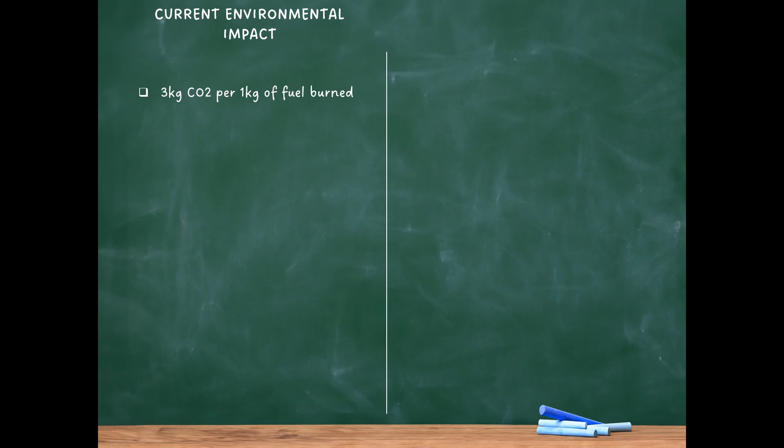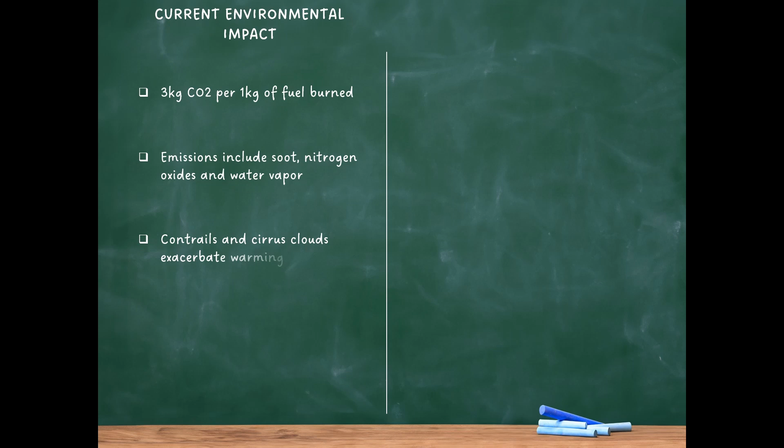To answer this question, we must first understand the environmental impact of current aviation practices. According to emissions research by the European Commission's Clean Sky Initiative, modern aircraft engines emit slightly more than 3 kilograms of carbon dioxide for every kilogram of fuel burned during a flight. Beyond carbon dioxide, these engines release soot, nitrogen oxides, and water vapor at high altitudes, all of which contribute to atmospheric warming. The problem is exacerbated by the formation of contrails and cirrus clouds, which trap heat in the Earth's atmosphere, further amplifying the warming effect.

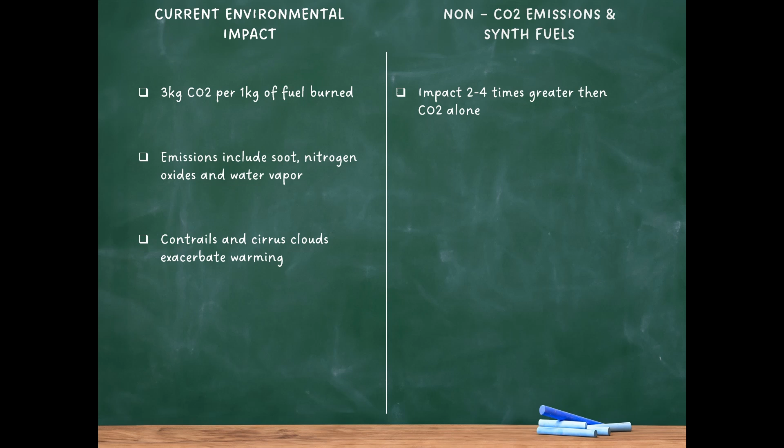Recent scientific studies suggest that non-carbon dioxide emissions from kerosene-powered aircraft could have an overall impact 2 to 4 times greater than carbon dioxide emissions alone. This means that aviation is responsible for approximately 3 to 7% of the total global carbon dioxide equivalent emissions from human activities, translating to between 2 and 4 billion tons of carbon dioxide annually.

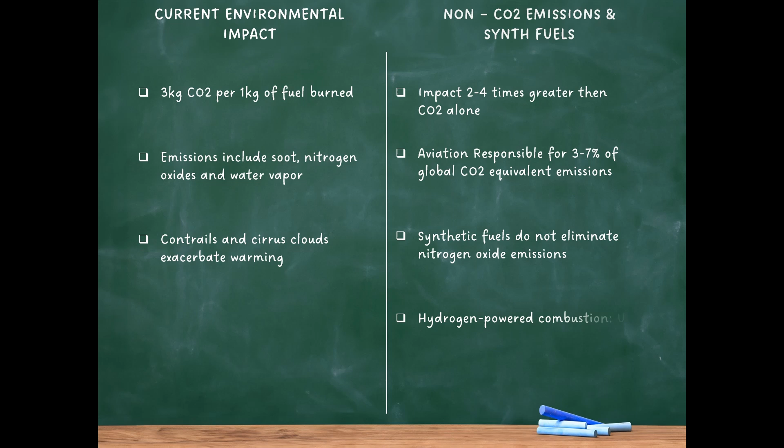The switch to synthetic fuels, while a step in the right direction, does not eliminate the nitrogen oxide emissions inherent to jet engines. However, initial research on hydrogen-powered combustion aircraft indicates a reduction in these emissions by up to 80% without significant efficiency losses. If hydrogen-powered fuel cells are used, the benefits become even more pronounced. Fuel cells eliminate nitrogen oxide emissions entirely, offering a clean and efficient alternative to traditional jet engines.

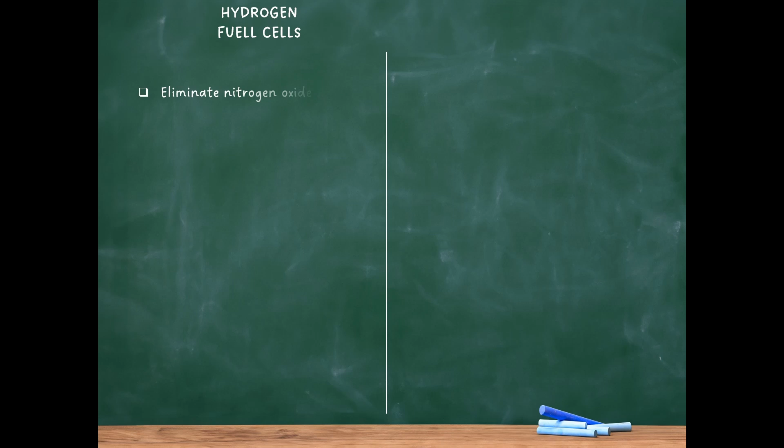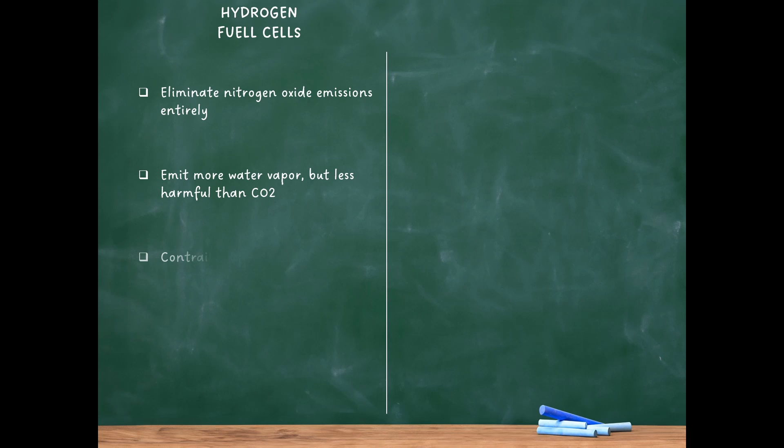However, hydrogen combustion and hydrogen fuel cells do emit water vapor, about 2.5 times more than synthetic fuels or kerosene. While water vapor is the dominant greenhouse gas in the atmosphere, individual water molecules are significantly less harmful than carbon dioxide molecules. Moreover, early simulations of hydrogen combustion show that the contrails produced by hydrogen-powered aircraft contain heavier ice crystals, which fall back to Earth more quickly, reducing the overall warming effect. Additionally, these contrails are free of soot, making them more transparent and less impactful on atmospheric warming. The result is a 30 to 50% reduction in the impact of contrails and cirrus clouds compared to kerosene-powered aircraft.

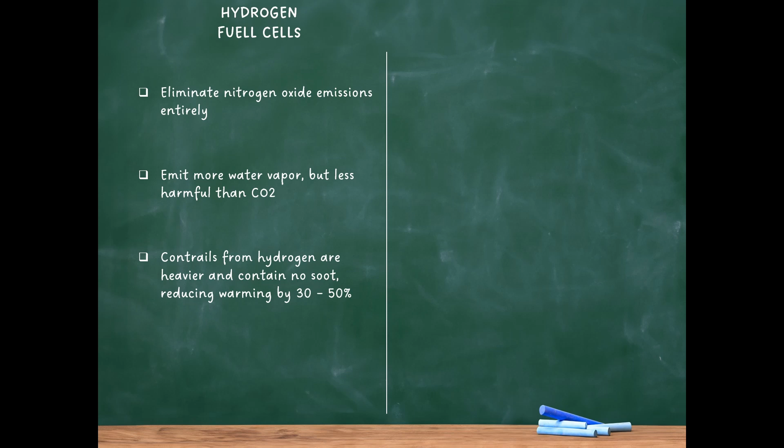In the case of fuel cells, the water vapor can even be captured and managed within the aircraft, further minimizing environmental impact. The differences in emissions are particularly relevant during the critical phases of takeoff and landing. Synthetic hydrocarbon fuels, while producing fewer particles than kerosene, do not significantly reduce other pollutants. Hydrogen, on the other hand, not only drastically reduces nitrogen oxide emissions, but also releases far fewer harmful particles and volatile organic compounds without any methane emissions.

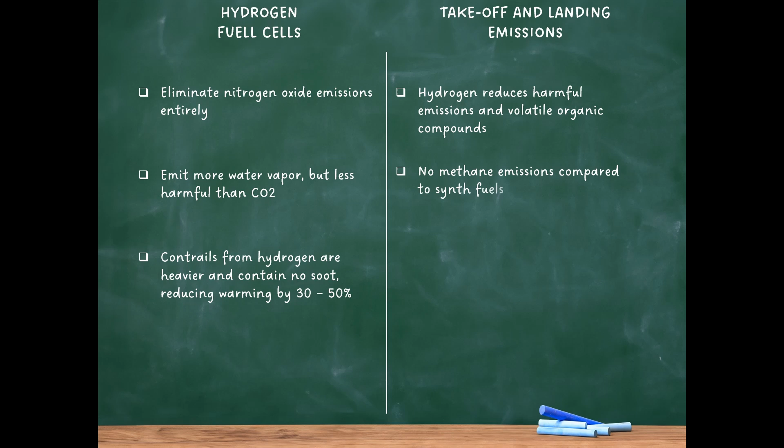At this juncture, it is important to acknowledge the role of lithium-ion batteries in aviation. While they produce no local pollution or atmospheric warming, their current limitations make them more suitable for short-haul flights under 1,000 miles. This is significant because 80% of pre-COVID aviation industry emissions came from long-haul flights. Studies by the European Union suggest that if the aviation industry were ranked as a country, it would be among the top 10 global greenhouse gas emitters.

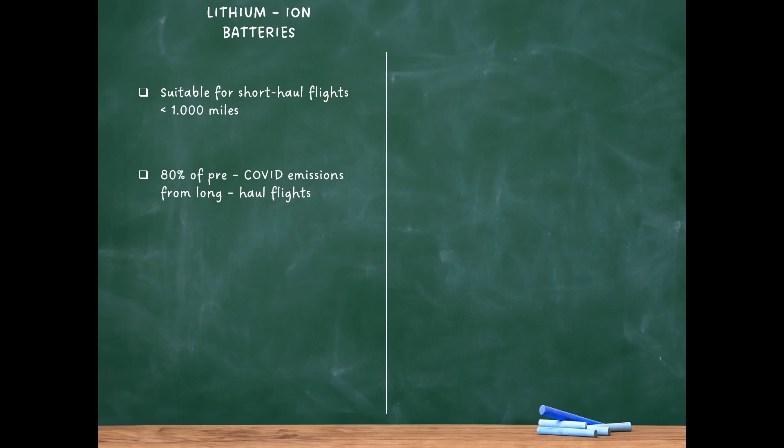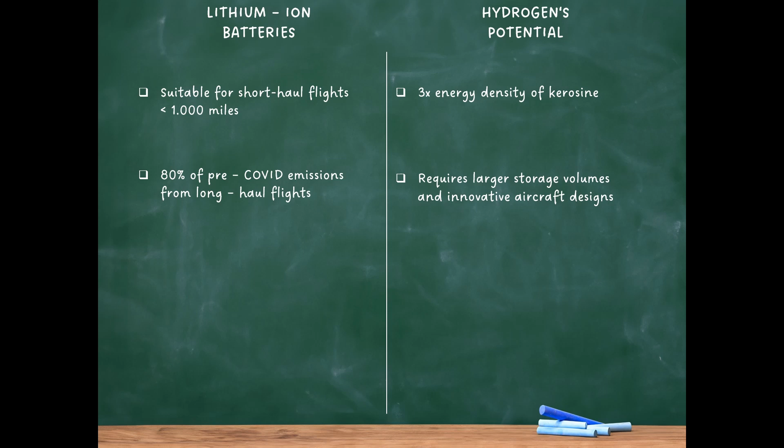Given these challenges, hydrogen has emerged as the preferred fuel for future aircraft development among major industry players. It offers a remarkable energy density, 3 times that of kerosene on a pound-for-pound basis. However, it also requires significantly larger storage volumes, necessitating innovative aircraft designs to accommodate these larger fuel tanks. This fundamental shift in design will influence everything from aerodynamics to passenger capacity.

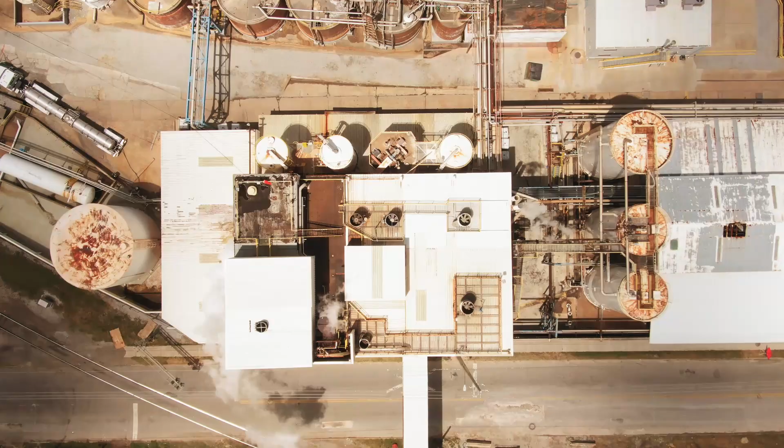Before delving further into the application of hydrogen in aviation, it is essential to understand how it is produced. Hydrogen can be generated through various methods, broadly categorized into production from renewable resources, nuclear energy, and fossil fuels. Currently, the most common method is natural gas steam reforming, which accounts for about 95% of global hydrogen production due to its economic efficiency. However, this method still relies on fossil fuels and contributes to greenhouse gas emissions. Alternatively, hydrogen can be produced through the electrolysis of water, a process that can be powered by renewable energy sources like wind or solar. This method offers significant environmental benefits, particularly if the efficiency and cost of production can be improved.

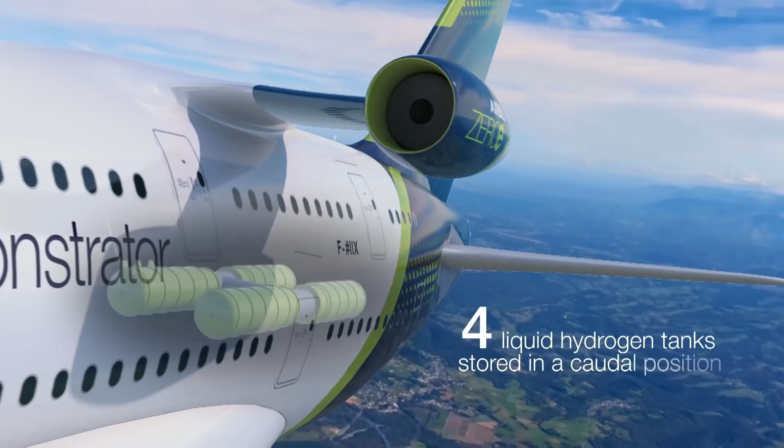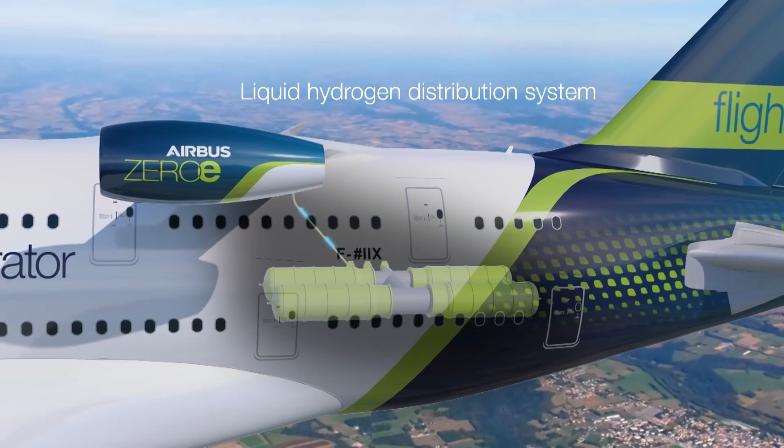As we consider these methods of hydrogen production, the next significant challenge lies in how to store and integrate hydrogen effectively within aircraft structures, which requires innovative tank configurations and shapes. The storage of hydrogen on aircraft poses significant engineering challenges due to its low density and the need for cryogenic temperatures to maintain it in a liquid state.

Liquid hydrogen has a volumetric energy density much lower than kerosene, meaning that tanks must be significantly larger to store the same amount of energy. This necessitates innovative tank configurations and shapes to integrate liquid hydrogen storage effectively into the aircraft design.

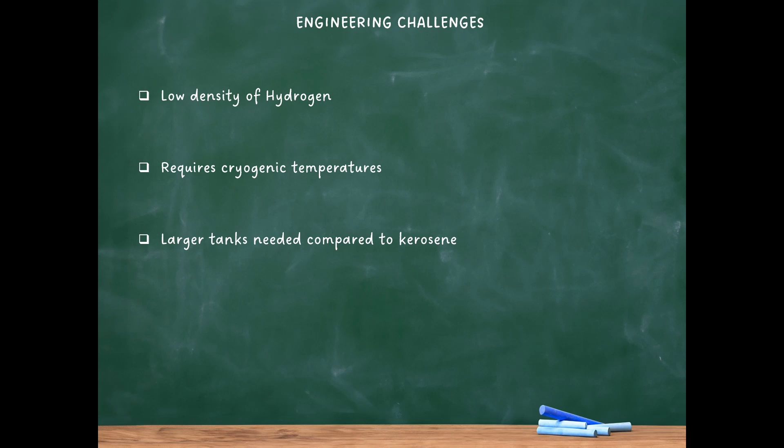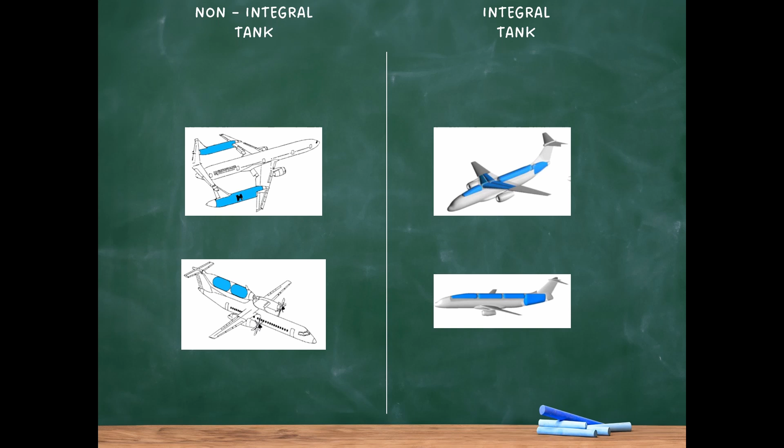Two primary tank configurations are considered: non-integral tanks and integral tanks. Non-integral tanks are mounted externally on the aircraft, such as on the fuselage or wings, which can lead to aerodynamic drag, but offers greater flexibility in design. Integral tanks, on the other hand, are built into the aircraft structure, offering reduced drag, but requiring the tanks to

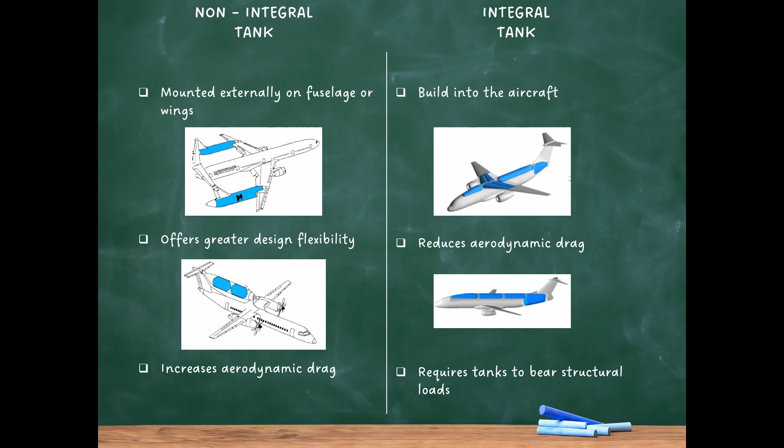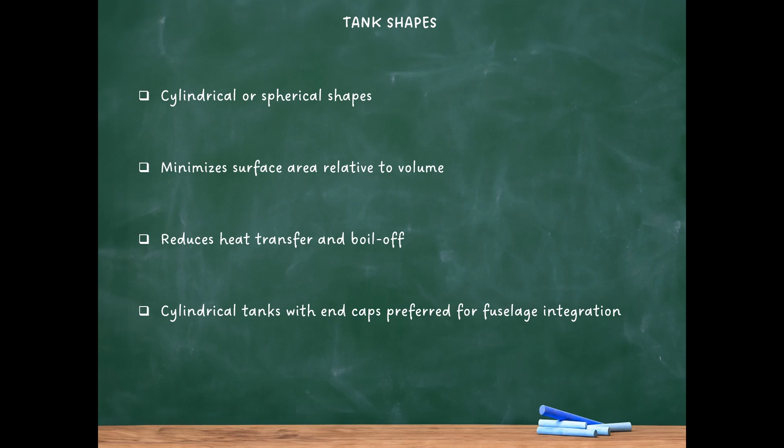bear structural loads. The shape of these tanks is typically cylindrical or spherical, as these shapes minimize surface area relative to volume, reducing heat transfer and thus boil off. However, cylindrical tanks with end caps are often preferred for their ease of integration into the fuselage and higher volumetric efficiency. Beyond the shape and configuration, another crucial aspect to consider is how these tanks are insulated to maintain the

hydrogen at cryogenic temperatures, which brings us to the importance of tank insulation and volume management. Insulation is critical for maintaining hydrogen at cryogenic temperatures during flight. Several insulation methods are used to minimize boil-off and maintain hydrogen in its liquid state. These methods include both internal and external insulation approaches, each with its own advantages and challenges.

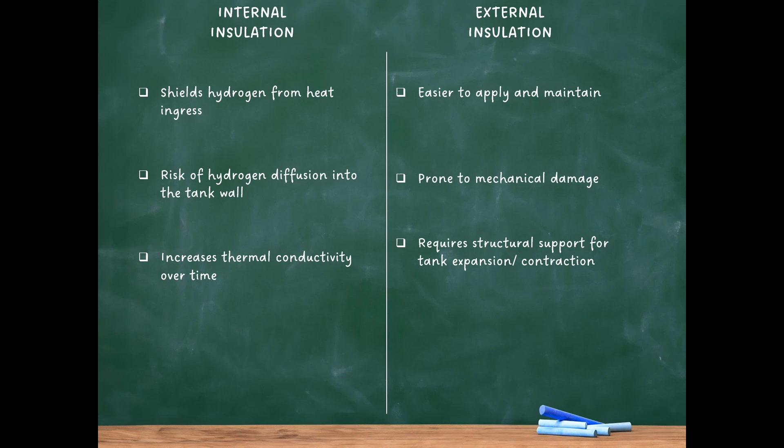Internal insulation involves insulating the inside of the tank, directly shielding the liquid hydrogen from heat ingress. However, this method can lead to hydrogen diffusion into the tank wall, which increases thermal conductivity and reduces effectiveness over time. External insulation, where the insulation is applied on the outside of the tank, is easier to apply and maintain, but is more prone to mechanical damage and requires structural support to accommodate the expansion and contraction of the tank

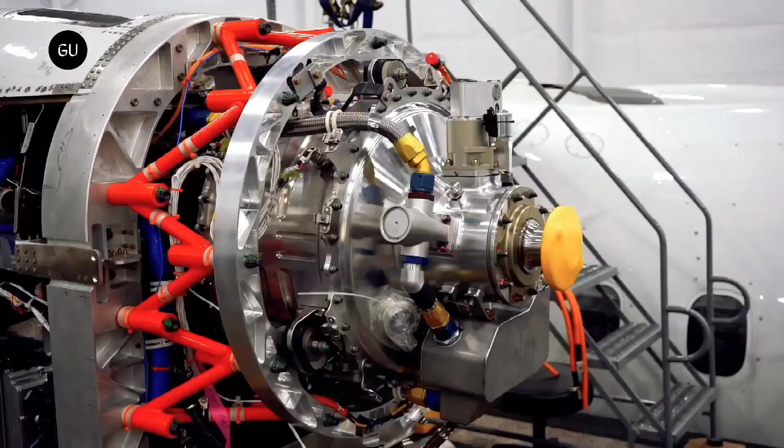during operation. The choice of insulation materials is fundamental to the performance of hydrogen storage tanks, particularly in maintaining cryogenic temperatures and minimizing boil-off. Among the most effective materials and techniques used are multilayer insulation, vacuum insulation, and foam insulation.

Multilayer insulation consists of multiple layers of reflective materials, typically alternating between metallized films and thin spacers, which are designed to minimize radiative heat transfer. The primary function of MLI is to reduce the amount of heat that penetrates the storage tank, thereby significantly minimizing the boil-off rate of liquid hydrogen.

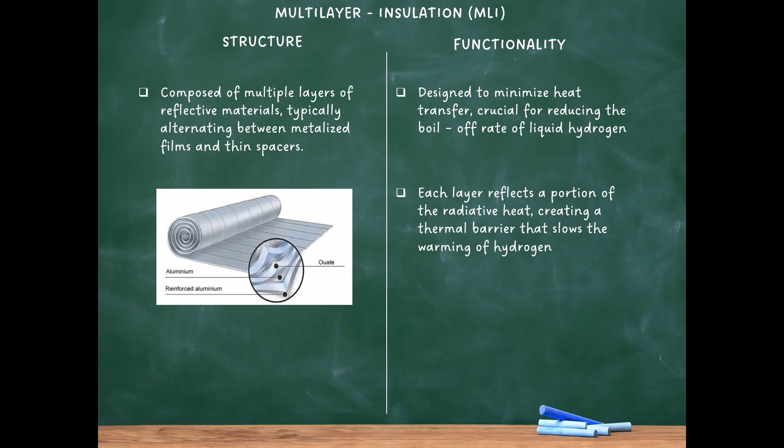The performance of MLI is largely dependent on the number of layers and the quality of the vacuum between them. Each layer reflects a portion of the radiative heat back towards its source, creating a thermal barrier that substantially slows down the warming of the hydrogen. In practice, MLI can reduce heat transfer by more than 90%, making it an indispensable component in the design of cryogenic tanks used for hydrogen storage in aircraft.

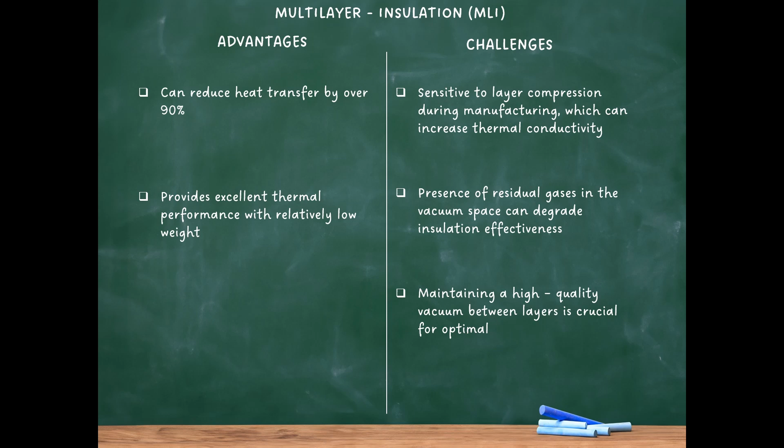However, MLI is not without its challenges. Its performance can be adversely affected by factors such as layer compression during manufacturing and the presence of residual gases in the vacuum space. Compression of the layers increases thermal conductivity, which can degrade the insulation's effectiveness. Additionally, maintaining a high-quality vacuum is crucial for MLI to function optimally.

Despite these potential issues, MLI remains the preferred insulation method for cryogenic applications due to its ability to provide excellent thermal performance with relatively low weight.

Vacuum insulation is another advanced technique used to minimize heat transfer into liquid hydrogen storage tanks. In a vacuum-insulated tank, the space between the inner tank containing the hydrogen and the outer shell is evacuated to create a near-perfect vacuum. A vacuum, lacking matter to conduct or convect heat, serves as an exceptional insulator, drastically reducing the amount of heat that can penetrate the tank.

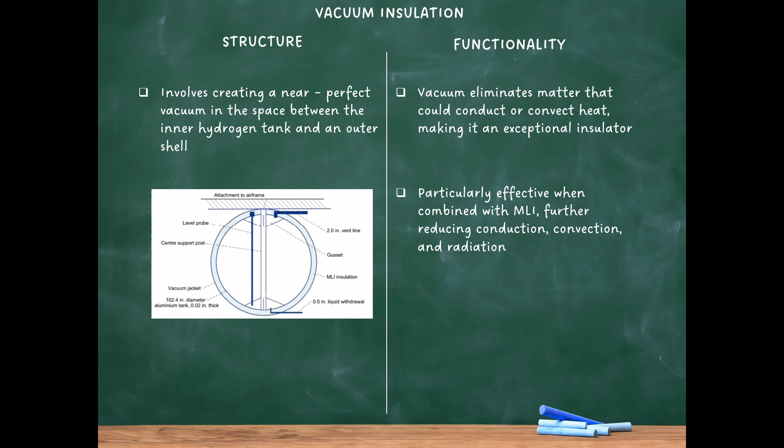Vacuum insulation is particularly effective when combined with MLI, as it further diminishes all three modes of heat transfer: conduction, convection, and radiation. The outer shell of a vacuum-insulated tank is typically designed to withstand external atmospheric pressure while maintaining the vacuum inside. This requires robust construction, often with additional structural supports to prevent the outer shell from collapsing under the external pressure. One of the main challenges associated with vacuum insulation is the long-term maintenance of the vacuum.

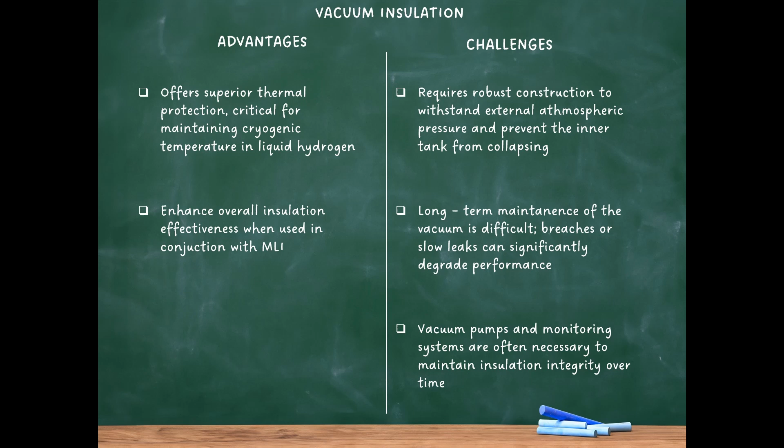Any breach or slow leak can significantly degrade the insulation's performance. To mitigate this, tanks are often equipped with vacuum pumps and monitoring systems to ensure the vacuum remains intact. Despite the complexity and higher cost associated with vacuum insulation, its ability to provide superior thermal protection makes it an indispensable technology for hydrogen storage in aviation.

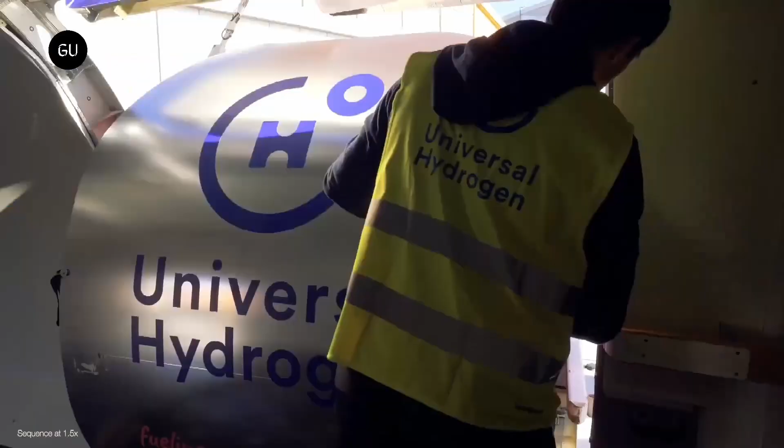Foam insulation offers a lightweight and cost-effective alternative to more complex insulation methods like MLI and vacuum insulation. Foam insulation typically involves applying a rigid, low-density foam material around the inner tank wall. This foam acts as a thermal barrier, reducing the rate of heat transfer and helping to maintain the hydrogen in its liquid state. One of the key advantages of foam insulation is its simplicity and ease of application.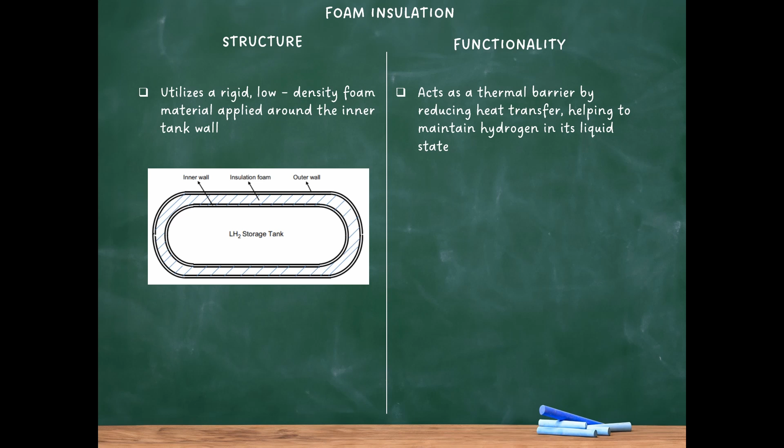Unlike MLI, which requires precise layering and careful vacuum maintenance, foam insulation can be applied more straightforwardly and is less susceptible to mechanical damage. Furthermore, foam insulation is more resistant to catastrophic failure. In the event of damage, the insulation's integrity is less likely to be compromised compared to a vacuum-insulated structure.

However, foam insulation does have its limitations, particularly in its thermal performance. While effective at reducing heat transfer, foam insulation is generally less efficient than MLI or vacuum insulation, especially under the extreme cryogenic conditions required for liquid hydrogen.

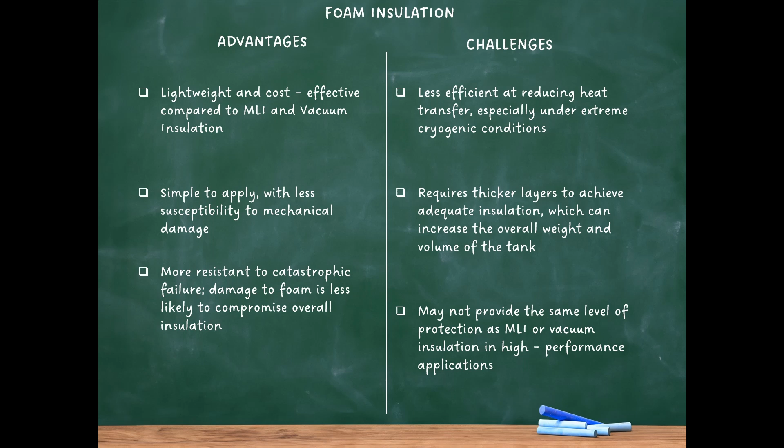Additionally, the thickness of the foam directly impacts the overall weight and volume of the tank, which must be carefully balanced in aircraft design. Despite these trade-offs, foam insulation remains an attractive option for specific applications where simplicity, cost, and weight are critical considerations.

The transition to hydrogen-powered aircraft engines introduces unique challenges, particularly in the realm of combustion. Hydrogen, while a clean and efficient fuel, presents specific difficulties due to its high flame speed and wide flammability range. These characteristics make hydrogen more prone to a phenomenon known as flashback, where the flame travels back into the fuel supply line, potentially causing an explosion.

To mitigate this risk and ensure safe, efficient combustion, advanced systems such as lean direct injection and micro-mix combustion are being developed and refined. Both methods are designed to optimize the combustion of hydrogen in aircraft engines by promoting thorough mixing of fuel and air, thereby reducing the risk of hotspots that lead to the formation of nitrogen oxides, which are a significant concern in high-temperature combustion processes.

Lean direct injection is a cutting-edge combustion technology that aims to achieve efficient combustion of hydrogen while minimizing harmful emissions, particularly NOx. The core principle of LDI is the injection of hydrogen directly into the combustion chamber in a lean mixture, meaning that the ratio of air to fuel is higher than in traditional stoichiometric combustion. This leaner mixture burns at a lower temperature, which is crucial for reducing NOx emissions, a primary environmental concern associated with high-temperature combustion.

The effectiveness of LDI lies in its ability to ensure rapid and thorough mixing of hydrogen and air before combustion occurs. This is essential because hydrogen's high flame speed and wide flammability range make it prone to flashback, where the flame could potentially travel back into the fuel supply line. To prevent this, LDI injectors are meticulously engineered to promote complete mixing of the fuel and air, ensuring that the flame front remains stable within the combustion chamber.

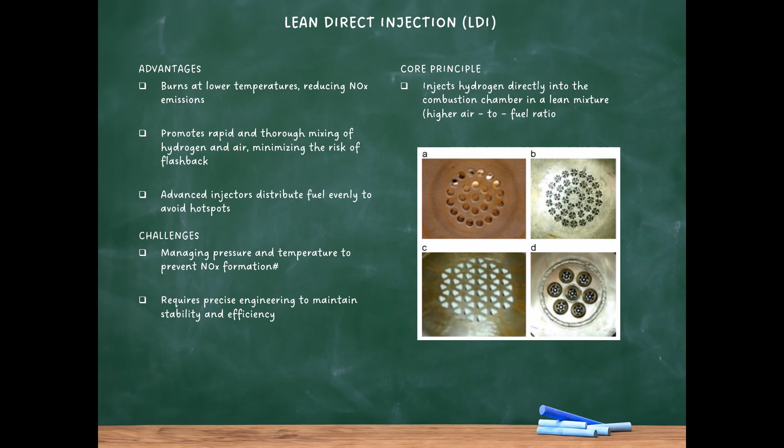By controlling the combustion process in this way, LDI systems can maintain a stable and efficient burn even at lean equivalence ratios, where the fuel-to-air mixture is more diluted.

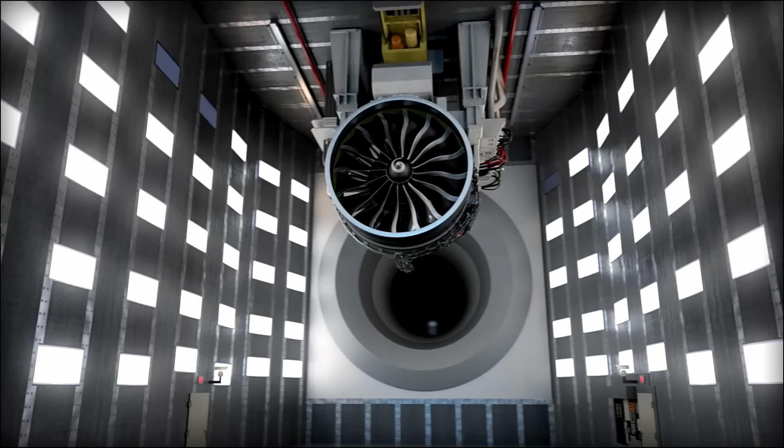A significant challenge in the implementation of LDI is managing the pressure and temperature within the combustion chamber to avoid hotspots that could exacerbate NOx production.

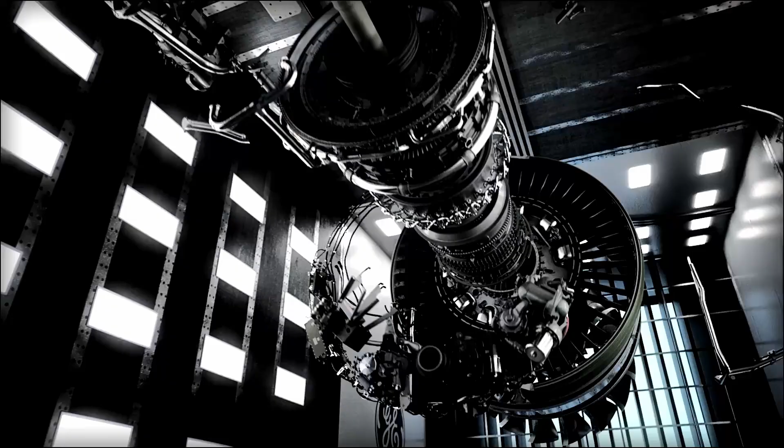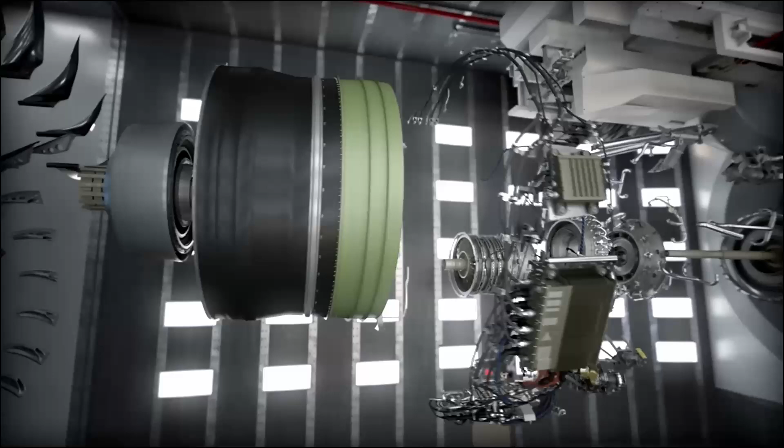Advanced injector designs, such as those developed by NASA, address this issue by incorporating multiple small injectors that distribute the fuel evenly throughout the chamber. This approach reduces the likelihood of hotspots and ensures a uniform temperature profile across the combustion zone. Additionally, these designs include features that prevent auto-ignition and flashback, making LDI a highly promising technology for hydrogen-powered aviation.

Micro-mix combustion represents another innovative approach to hydrogen combustion in aircraft engines. Unlike conventional combustion chambers, which typically feature a single large flame, micro-mix combustion utilizes numerous small, localized flames. The concept behind micro-mix combustion is to increase the number of flamelets within the combustion chamber, thereby enhancing the mixing of fuel and air at a microscopic level.

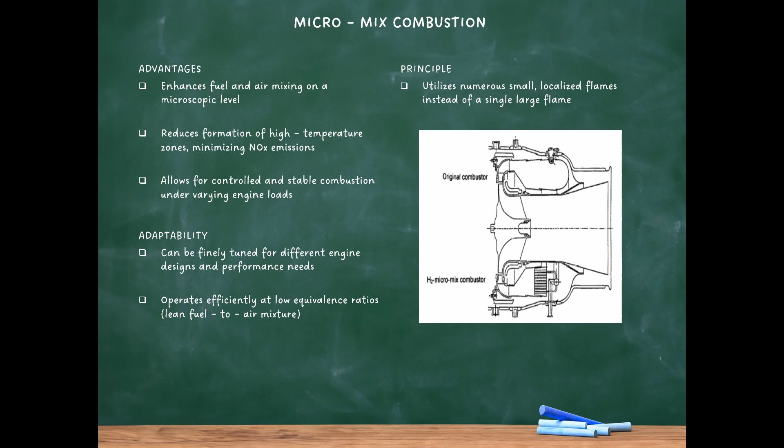This results in a more homogeneous combustion process, which significantly reduces the formation of high-temperature zones that contribute to NOx emissions. In a micro-mix combustor, hydrogen is injected through a multitude of small nozzles, each generating a mini flame. This high level of dispersion and mixing allows for a more controlled and stable combustion process, even under varying engine loads and operational conditions.

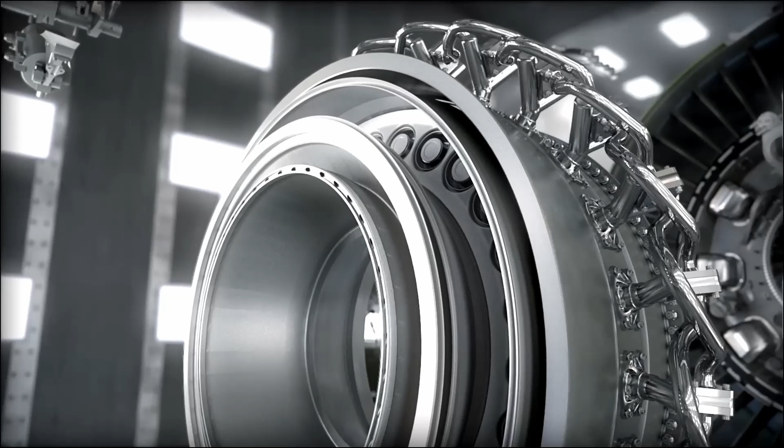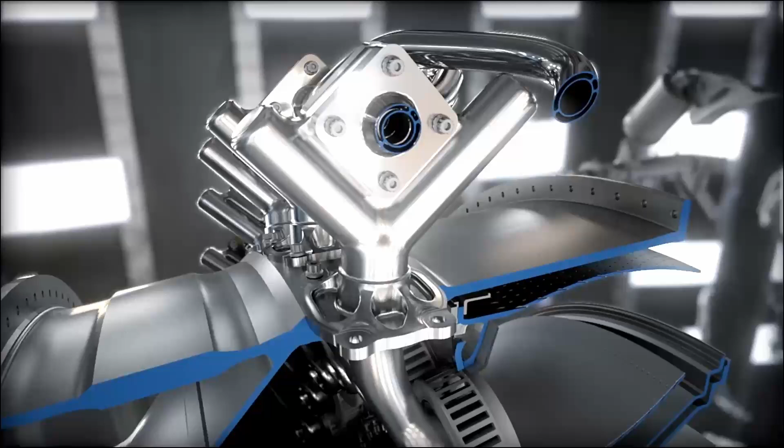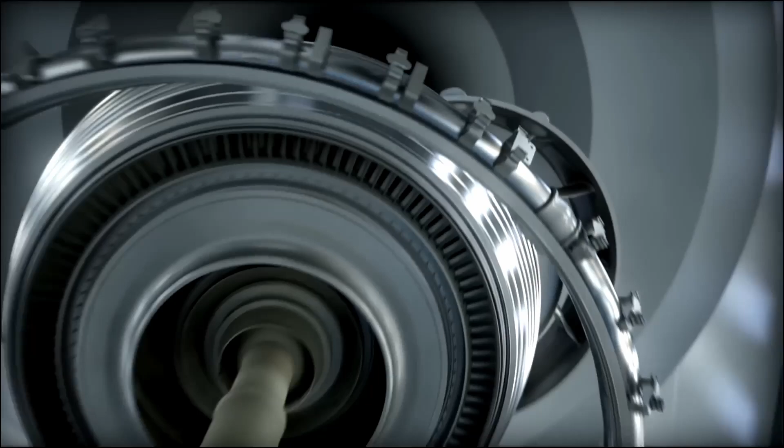The micro-mix approach minimizes the risk of localized high temperatures, which are the primary cause of NOx formation. Additionally, micro-mix combustion systems can be finely tuned to adjust flame temperature and distribution, making them highly adaptable to different engine designs and performance requirements. Micro-mix combustion systems have demonstrated significant reductions in NOx emissions compared to traditional combustion methods. This is particularly important for meeting stringent environmental regulations and advancing the sustainability goals set by the aviation industry.

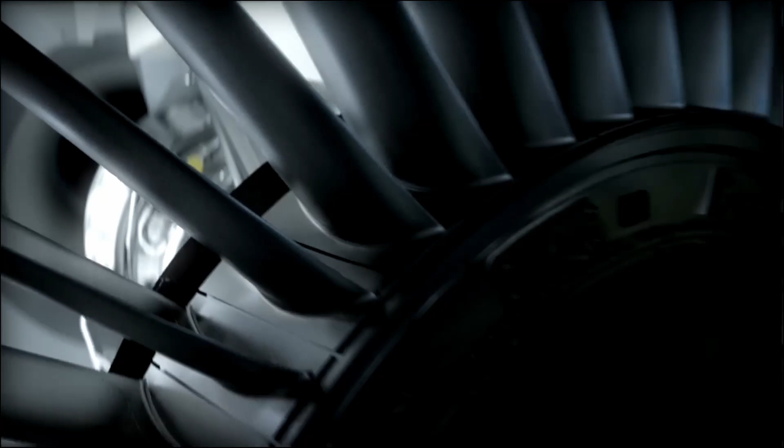The ability of micro-mix combustors to operate efficiently at low equivalence ratios, where the fuel-to-air mixture is leaner than in conventional systems, makes them an attractive option for the future of hydrogen-powered aircraft.

As we look towards the future of hydrogen-powered aviation, addressing safety concerns is of utmost importance. Hydrogen, while non-toxic, is highly flammable, and its storage and use in aircraft require meticulous attention to safety protocols. The development of hydrogen-powered aircraft hinges on ensuring that these safety concerns are thoroughly addressed and mitigated.

Hydrogen's flammability is a key risk factor, but when handled properly, it can actually be safer than conventional fuels such as kerosene or methane gas. One of the reasons for this is hydrogen's low molecular weight, which causes it to disperse rapidly into the atmosphere in the event of a leak. This rapid dispersion reduces the risk of fire significantly compared to heavier fuels like kerosene, which can pool on the ground and ignite, leading to extensive fires that are difficult to control.

In controlled environments, hydrogen fires tend to cause less widespread damage because they burn quickly and upward away from people and structures rather than spreading across surfaces.

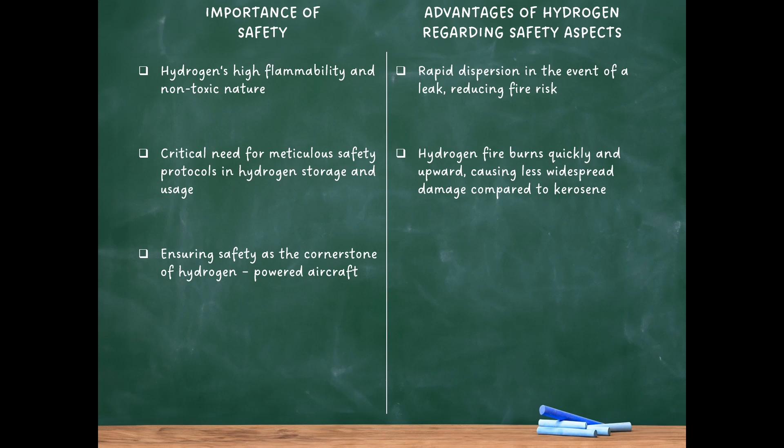Despite these inherent safety benefits, rigorous safety standards are essential in the development of hydrogen-powered aircraft. No commercial hydrogen-powered aircraft will be permitted to operate until it has successfully passed the stringent safety tests mandated by aviation industry regulations. These tests ensure that all potential risks associated with hydrogen use, including leaks, fires, and structural integrity under various conditions, are fully understood and mitigated.

To further enhance safety, several measures are being integrated into the design and operation of hydrogen-powered aircraft. One crucial safety measure is the use of purging systems that remove air from fuel lines before hydrogen is introduced. This step is vital in preventing the risk of flashback during startup, where residual air could ignite prematurely. By ensuring that the fuel lines are completely purged of air, the risk of unintended ignition is significantly reduced.

In addition to purging systems, the placement of fuel tanks within the aircraft is also a critical consideration. One proposed safety enhancement is positioning the hydrogen fuel tanks above the passenger cabin. This configuration offers additional protection for passengers, as it places the tanks in a location less vulnerable to impact and potential fire hazards. Should a fire occur, the design ensures that the flames are directed away from the passenger cabin, providing an added layer of safety.

In the event of a hydrogen fire, the most effective strategy is to stop the flow of gas, which allows the fire to burn out safely on its own. This approach leverages hydrogen's rapid dispersion and the fact that it burns without producing harmful smoke, unlike kerosene fires, which generate toxic fumes and spread across large areas.

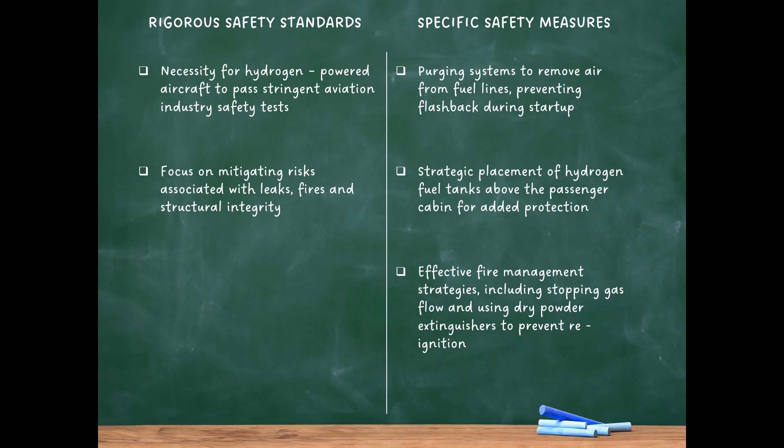With the implementation of these comprehensive safety measures and the rigorous testing required by industry standards, hydrogen-powered aviation has the potential to be as safe, if not safer, than current kerosene-powered aircraft. This commitment to safety, combined with hydrogen's environmental benefits, makes it a promising alternative for the future of air travel.

Major players in the industry, including Rolls-Royce, Boeing, and Airbus, are actively working to overcome these challenges. The general consensus until recently was that hydrogen-powered aircraft would not be commercially viable until at least 2050. However, Airbus's new target of 2035 has accelerated the timeline, bringing the possibility of zero-emission flight closer to reality.

This optimistic forecast is supported by Airbus's Vice President for Zero-Emission Aircraft, Glenn Llewellyn, who stated, "We see it as something that airlines are asking for from us, and moreover, we see it as a moral obligation to enable climate-neutral flying for society." Llewellyn believes hydrogen is the most promising path to decarbonizing aviation, but stresses that widespread adoption of hydrogen will require collaboration across industries.

This includes not only the aviation sector, but also energy providers, airports, regulators, and technology partners. The success of hydrogen-powered aviation will also depend on the continued decline in the cost of wind and solar energy, which are essential for producing green hydrogen through electrolysis. Hydrogen production costs are expected to drop significantly in the coming years as global production ramps up.

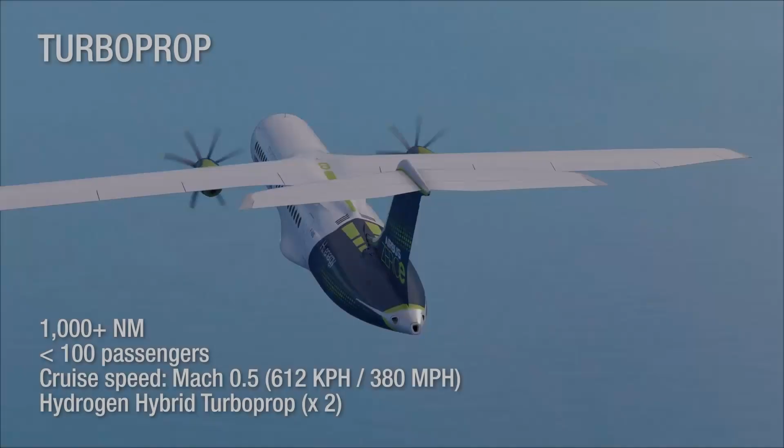For short-haul flights of up to 1,000 nautical miles with around 100 passengers, Airbus has developed a propeller-driven system known as a turboprop. This system is highly efficient and climate-friendly, benefiting from hydrogen's lower emissions profile, particularly during takeoff and landing. The hydrogen fuel cell provides additional power, enhancing overall efficiency and reducing environmental impact.

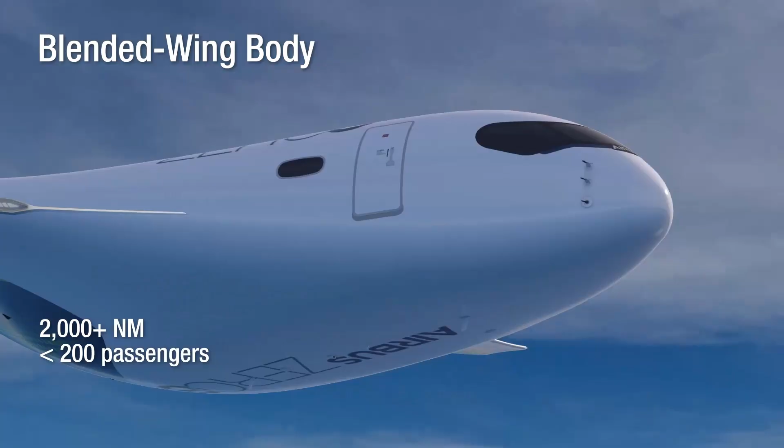For longer-haul flights exceeding 2,000 nautical miles, Airbus is developing 2 other options. The first is a more traditional turbofan design capable of carrying approximately 200 passengers. This aircraft will feature an extended fuselage to accommodate the larger hydrogen fuel tanks, with hybrid hydrogen systems powering jet engines on each wing. The second option is a revolutionary blended wing body design where the wings merge seamlessly with the main body of the aircraft.

This innovative design allows for hydrogen fuel storage across the entire underside of the fuselage, offering a range of about 2,000 nautical miles. The blended wing body also provides a wider cabin space, accommodating around 200 passengers.

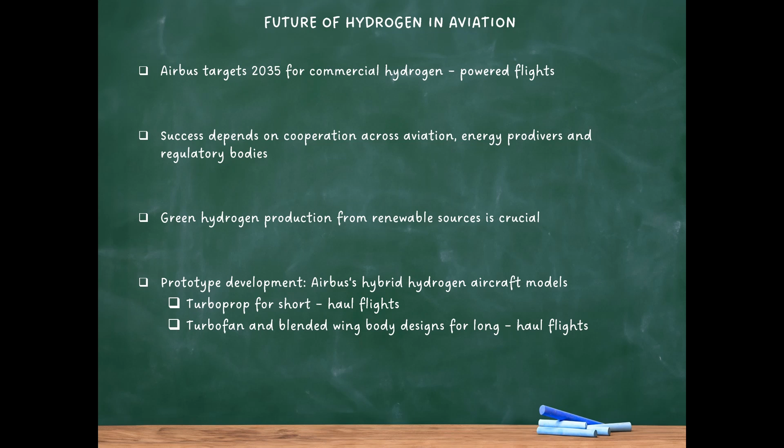Airbus plans to invest hundreds of millions of euros in hydrogen technology by 2025, with further investments reaching several billion euros by 2035. Llewellyn emphasizes that Airbus cannot achieve this vision alone. We need regulators, airports, energy providers, and technology partners, and it's through collaboration with all these colleagues that this will truly become a reality.

In conclusion, hydrogen-powered aircraft represent a critical step forward in the quest for sustainable aviation. While challenges remain, the potential benefits, reduced emissions, cleaner skies, and a sustainable future for air travel make this an endeavor worth pursuing. The journey toward hydrogen-powered aviation is not just about technological innovation. It's about redefining the future of air transport and ensuring that the skies remain open and clean for generations to come.

If the aviation industry continues to follow this ambitious path, hydrogen-powered planes could not only shape the skies of today, but also lay the foundation for a more sustainable and environmentally friendly world tomorrow. It is up to us to embrace and support this transformation.